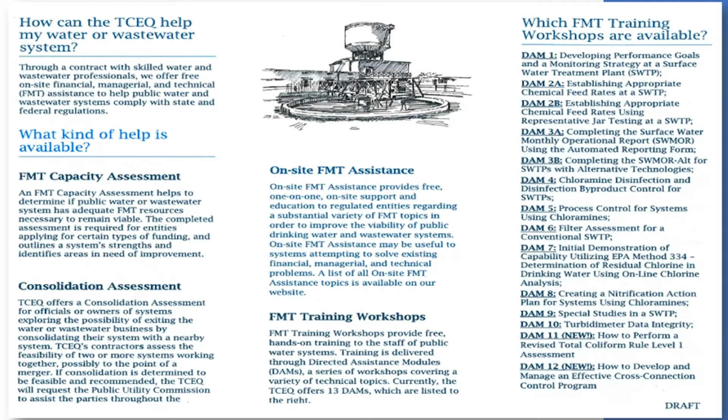We also have our Environmentor program, which assists small businesses, local governments, and independent school districts with environmental regulations and technical questions. Environmentors are qualified professionals with technical and legal expertise on environmental issues who volunteer their time to help our customers. Examples include consultants, water operators, engineers, and attorneys. A compliance specialist can help you determine if you qualify for this program and see if we can find you a match.

So we also have online resources for public water systems. This slide shows you our compliance resources for transient non-community systems. And I just did a screenshot, so this list is actually much longer on our website. But you can see how you can find out more information about how do I prepare for an investigation, or what are my operational requirements. So again, these are some resources we have available to you.

Before I get into the notebook, I just want to show you this short video on our Environmentor program. Ooh, what's it doing? Please remember this program is free and you can contact a compliance specialist for more information. Also, just a note, this video is from 2017, so there may have been some administrative changes.

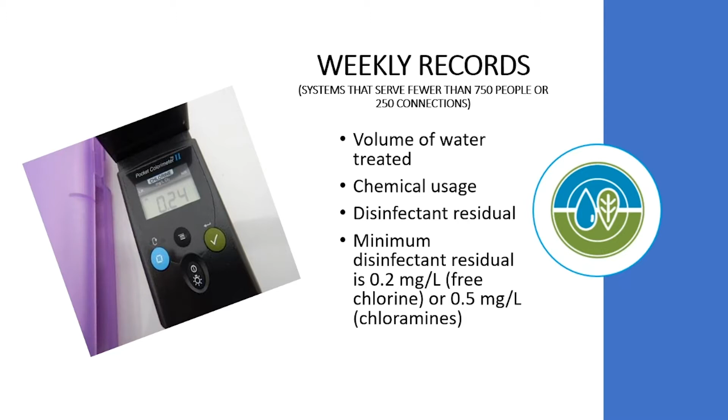All right, now I'm going to go over one of your handouts that's titled Guidance for Bacteriological Sample Collection Standard Operating Procedures. So these are some guidelines on how you want to collect your bacteriological sample. You'll see, if we start with sample site, make sure it is not low to the ground. Make sure the faucet has a downward facing outlet, at least 18 inches above the floor or ground. That's just to make sure that, when you put that spigot on, there's not going to be any debris that shoots up and potentially contaminates your sample.

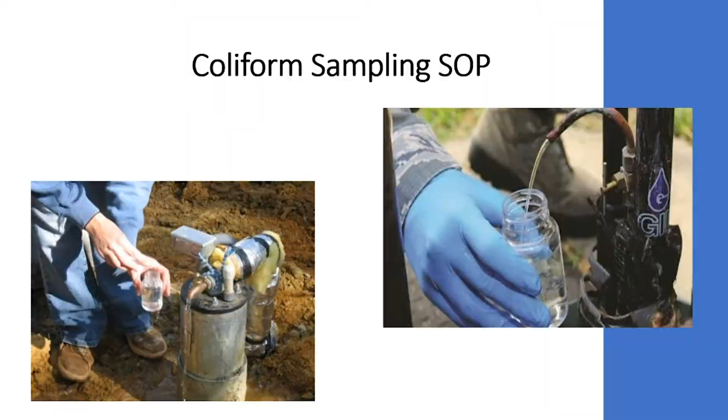So if you have dead-end mains in your distribution system, and you may not, but if you do, you'll need to flush them on a monthly basis. This keeps the water moving around so it doesn't get stagnant, because stagnation in drinking water is not good. That's when you can get a reduction in your disinfectant residual and potentially have an increase in bacterial growth. So the rules do not require you to take a chlorine residual at the start of flushing or at the end, but it may be a good idea so it ensures you're getting fresh water flowing through the pipes.

And if you go to page 29, you'll see that we've provided you with a flushing log. Again, we have a similar format. In the right-hand corner, you can put your facility name and your PWS ID, plus the year that you're monitoring. Down below, you can put the location that you're flushing. You'll put the date, the total time you flushed, and then the volume flushed in gallons.

Quarterly records. So now I'm on page 31 of the compliance notebook. Disinfectant residual analyzers need to be verified to ensure they're reading correctly within the manufacturer's allowable range specifications. We've provided you with 2 forms for you to keep records of this. The first form is on page 33, and that's where you'll document your equipment. You can see down below, you can put the manufacturer, the model, and the serial number. And then if you go to page 35, you can see that's where you can document your 90-day calibrations.

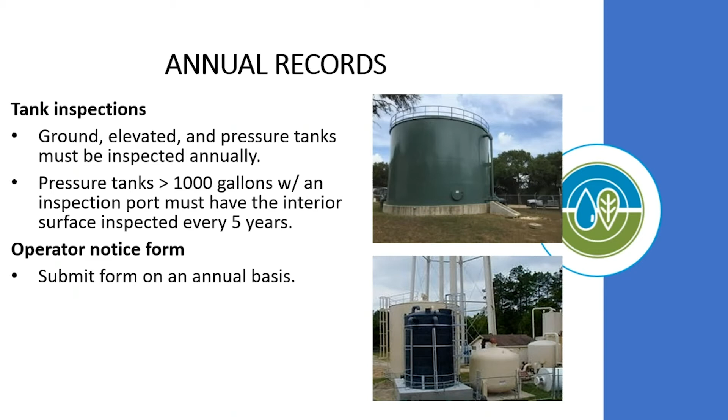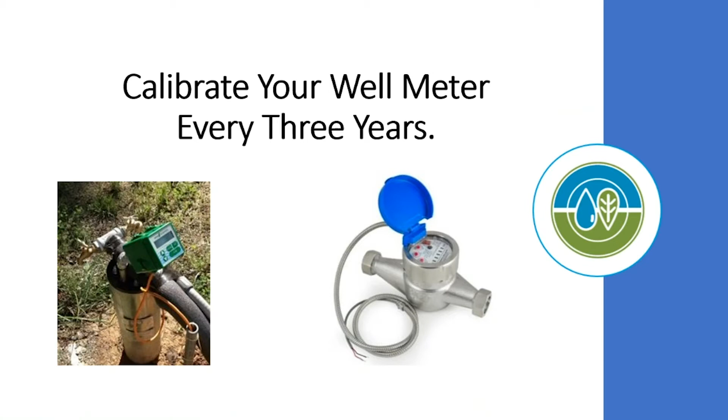Records kept every 3 years, that's page 41 of the compliance notebook. Well meter calibrations are required every 3 years, or you can replace the equipment. They can be mailed off for testing, or some companies will actually come to your facility because they'll have the equipment to test the meter. So we provided you a placeholder to keep those records. All right, that ends the part of the actual notebook I'm going to be going over.

Now I'm going to show you how to find a licensed water operator. The rules do not require you to have one, but I do think this is useful information. Some people actually have water operators that leave and then they don't know where to find a new one. So if you go to the link that I've provided on the slide, it's going to take you to our website, which is right here. All right, so this is on our website, and it says how to find a licensed water operator. You'll then go to a web search. So click on here.

And then under all license types, I'm going to go to group search criteria. All right, once it pulls up, I'm now going to go to type and level. And I'm going to scroll down till I see water operations company. Now you can specifically search for a specific license, so an A water operator or a D licensed water operator, but you won't know if they're actually available to help you with your system. They may be employed elsewhere. So that's why I go to water operations company.

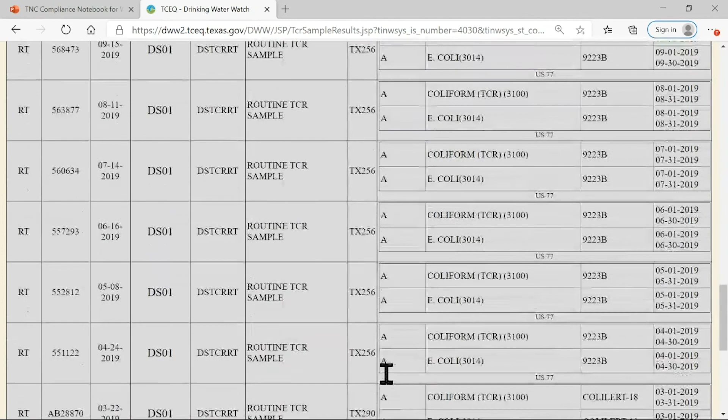But what we're going to be looking at here when we're looking at these samples is this is a routine TCR sample. And what's really important is next to the coliform here and E. coli here, we want to see an A for absent and an A for absent as well. If there was a positive sample, the sample would be bolded red, and we would also see a P like this. And we can see that this was a positive for coliform, so we know that maybe something's going on.

And then we can also confirm that the system pulled their required raw from the well, and then they pulled their repeats for the same location in the upstream and the downstream. So they're in compliance with the rule, but maybe they had a problem here. And if this ever happens to your system and you need help troubleshooting what's causing the positive, let us know. We can try to help you. Our environmentors that Heather talked about can help you, and our FMT can help you as well. But just so that you can see here, this is how those will look.

And if you have a large system with a lot of samples, you can also click the second option, which is the recent positive TCR results. And this is only going to show positive samples. So you see how that just decreased to only 2 samples versus multiples and all the pages of those. And again, we're going to see that these are in red as well, that these are positive samples.

And on that note, it's a good thing to keep record of. It looks like this happened for them in August. And so I would definitely recommend keeping some records of what was causing the positive and what they did to rectify the problem. Did they identify what the problem was and fix it? Because when an investigator comes out, they're going to ask you about those positive samples and ask you what you did to fix them or what was the problem, things like that. So just being as prepared as you can.

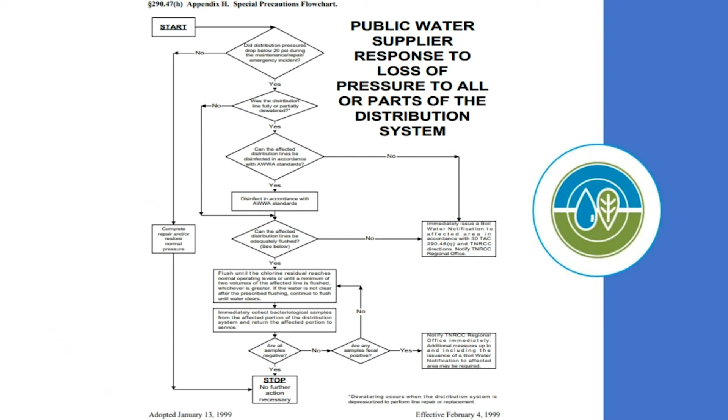All right, we are on page 53 in our notebook, and we're going to talk about maintenance here. So any cleaning or repairs that have to be done or are routinely completed should be tracked in the log that we provided for you on page 55. You'll see there's just a couple of boxes there, and obviously if you do a lot more maintenance, you can modify this to fit your system. And if you need help with that, then we can help you as well.

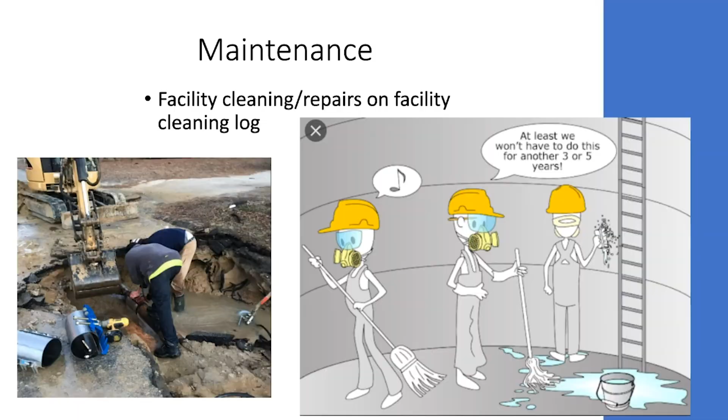And then if you have street names, like if it's an RV park or something like that, the street names can be really helpful because someone coming in doesn't know the locations there. And if you tell them it's over by so-and-so's house or something, you know, they can't always find it. So the street names are really helpful. And then also, if you have the information on the water line sizes or any purchase meter or service meters that you have for the system as well.

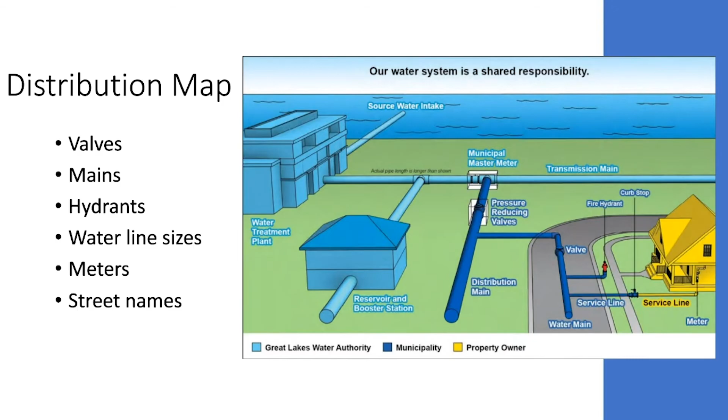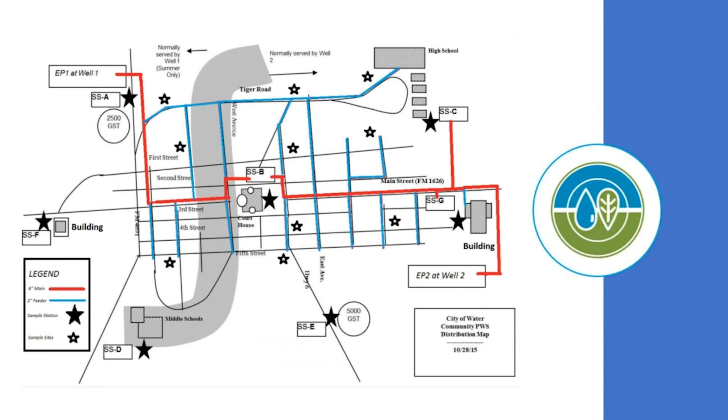And something like that can be really helpful because if we didn't have the legend, we might not know what we were looking at. But using that legend to try to help explain to a user that wouldn't use this distribution map frequently can be really beneficial. And I have one more. This is more of a treatment plant map. So the well house, the water treatment plant, whatever you want to call it.

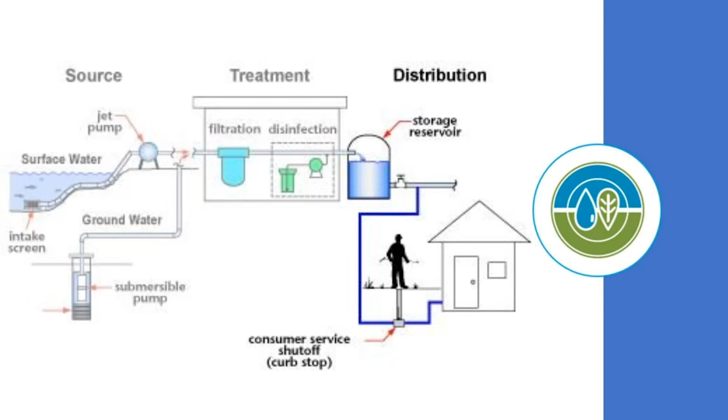Okay, now we are on page 61 in our notebook, and we're going to talk about the plant operations manual. So again, like the distribution map, this has to be ready and available for review. And when it really comes in handy and is important is for emergency situations. So if there's some kind of emergency that's happening and the main water system operator or the person who's usually in charge of making sure the plant is okay is not able to get there, or they're not able to fix the problem.

The idea of this plant operations manual is that another member of the facility would be able to follow the instructions in the plant operations manual and start up the system or fix the issue or follow along to figure out what needs to be done with those emergency protocols and that kind of thing.

And another good idea of things to include in here as well is any manufacturing manuals that you get for equipment at your system. You could definitely include those in here as well, because questions will come up about what type of equipment it is and what its capacity is, things like that. And if you have those manuals, then that information should be provided there as well.

Now, we do have a template for the plant operations manual, and that is available in our asset management guide. And I think somebody will be able to post that in the comments for you as well in case you want that. But if not, just let us know and we can get you a copy of that as well.

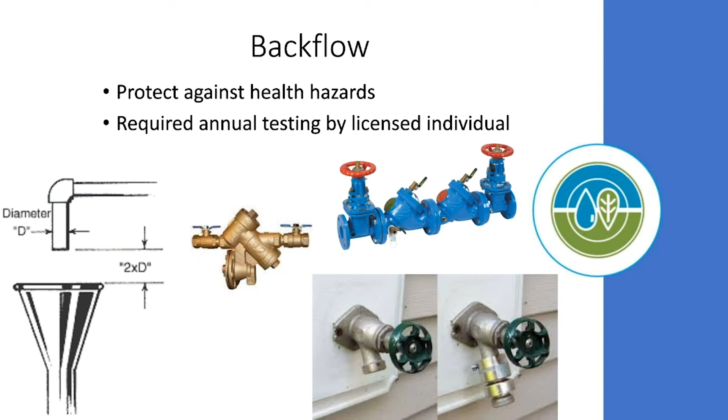And the type of backflow prevention assembly testing equipment that's required is based on the type of health hazard that's present. And we do have a reference with a whole list of these, again, in our 30 Texas Administrative Code. It's in subchapter 290, again, 290.47, and this one is going to be F, as in Frank. And so where I told you that list for the boil water notice was, that decision matrix, it's right before that in the back appendix there. And if you need help getting to that list, you can let us know, we'll help you out.

All right, we are now on page 89 in our notebook, and we're going to talk about purchase water contracts. So these are required if you purchase water from another water system, or if you are the wholesaler, you're required to have a purchase water contract. And we recommend that these purchase water contracts include things like dates of use, any expiring dates of use, agreed upon rates for what the system is going to be purchasing at, any maximum amounts or minimum amounts for bill or usage, and then general terms of usage.

So if there's some requirement or stipulation that the system has to use X amount or they're billed another set amount for that amount. And this is a legally binding document, and this is something that your investigators are going to be looking for. So it's really important that you both have this purchase water contract and that you're aware of whatever stipulations are in there as well. And there have been times that people have really outdated purchase water contracts, and at that point, it's something that you may want to address with either your purchaser or your wholesaler about revisiting the claims in that purchase water contract.

All right, now we are going to talk about notices of violations and the corrective action, and that is going to be page 93 in your notebook. So these notices of violation could be given if you have any monitoring or reporting or public notice violations like what we saw with the Water Supply Division, and those would come out of Austin.

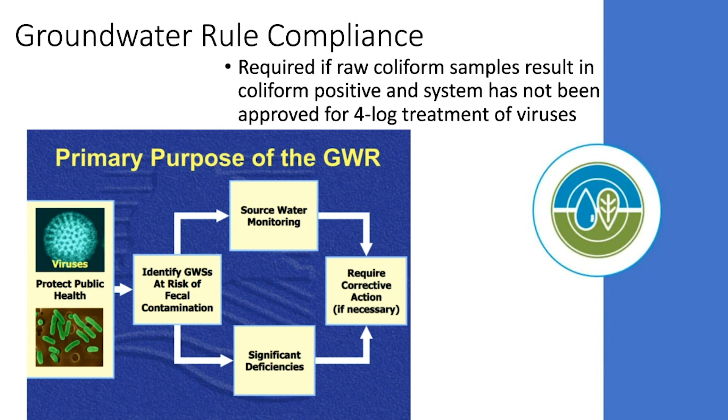And so essentially, we developed this rule and our TCR rule to try to help with the positive samples that are coming back for coliform, figuring out why the positives are happening and how we can prevent those in the future. And like I mentioned before, and I think Heather mentioned as well, if your system is struggling with positive coliform samples and you're not sure why, try using that SOP that Heather pointed out to you, and then let us know, and we can get you some assistance from FMT or our Environmentor to try to help you reduce those positive coliform samples that you're getting at your system.

All right, now we are on page 105 in our notebook, and this is going to be the revised total coliform rule, or the RTCR. This is the most current version of the rule, and you'll hear people call it the new RTCR rule. It used to be the total coliform rule, and when it was revised, it was listed as the RTCR, the revised total coliform rule. And that was done in 2015.

And so this is the current requirement, but if a system pulls a multiple total coliform positive sample or a combination of the E. coli or fecal with a total coliform, then they trigger what's called a level 1 or a level 2 assessment, and those may be required at that point. I mentioned these to you when I showed you the site visits portion of Drinking Water Watch. And the purpose of this assessment is to identify what we call a sanitary defect, or an SD, in the system that could be causing these repeat positives.

It's not to wag our fingers at someone and tell them that they've done something wrong. The purpose of these level 1, level 2 assessments is to try to help figure out what's causing those problems, like I mentioned, and how do we prevent them from happening again. And the level 1 assessment is going to be conducted by the facility at the facility, and the level 2 assessment is going to be conducted at the facility, but with the assistance of TCEQ. So one of our staff will be out there to help you in identifying that sanitary defect.

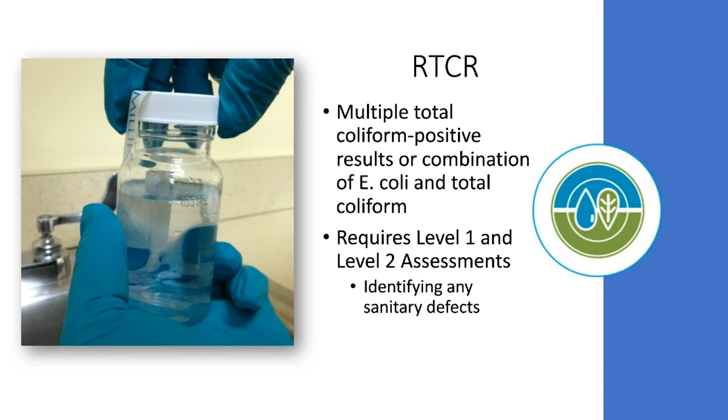Right, we are on page 109 in our notebook. And we're going to talk for a minute about seasonal public water systems. If your system doesn't meet the definition of a seasonal water system and you know that you're not seasonal, then you can recycle this page and page 111 from your notebook, as it wouldn't be applicable to you. But seasonal water systems are going to really apply to places like summer camps. And I think that they're kind of the best example for this.

So when you think about it, that summer camp is probably not open year round, but during the summer when they are open, they do meet the definition of a PWS. They've got at least 25 people out there, and they're open. The summer is more than 60 days. And so the rest of the year, that summer camp is probably shut down. They're not using the water. No one's out there really, unless it's like one maintenance guy or someone who lives out there.

And before they start serving again, they have to complete a startup procedure and certify that completion, which includes some necessary sampling and then any repairs that would be required to be done. And we do have that checklist if you are a seasonal water system and you do need help with that. But like I said, if you're not a seasonal system, then you can just disregard this section.